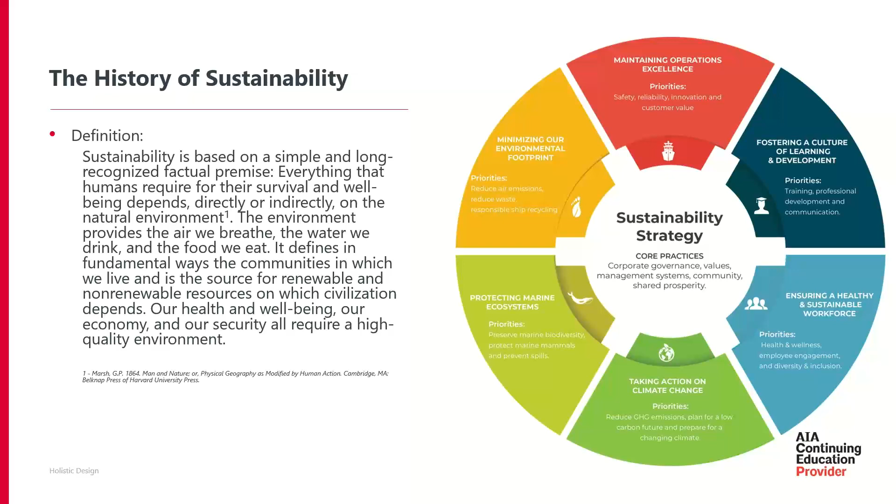Climate change, no matter what your opinion is about climate change, one of the things that we can all agree on is that the need for being responsible with our natural resources, no matter what they are, is super important because we only have so much of all of it. And then protecting the marine ecosystem, one of the many things that we see, especially if we live anywhere near a coast, the horrors of people that have really damaged our oceans and damaged our coastlines. So taking all of that into consideration is important.

So as we move forward, I really want to talk about the history of sustainability. Most people understand it started in the last 20 years, but realistically, it really started from the 1940s, really looking at how sustainability can be pushed into the public realm. So, one of the things I like to tie everyone to, you have to all remember in 1950, the world had a population of 2.5 billion people. And government agencies were really starting to understand that we were growing at a faster rate, and somehow we were going to have to be able to accommodate all the people that were eventually going to be on the planet.

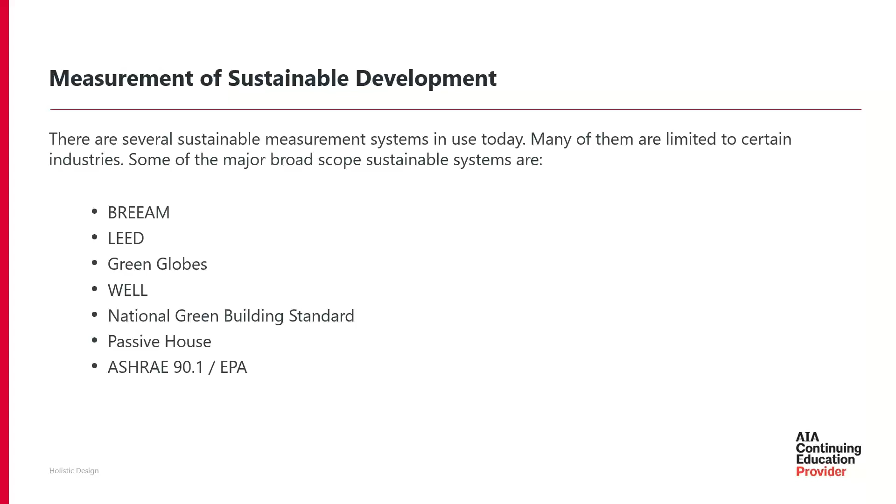BREEAM was the first and was really the precursor for LEED and subsequently Green Globes. We also have WELL now, which was a fold out from really the USGBC and LEED, and then the National Green Building Standard, which many states are now adopting. So we've got green building requirements that exist as part of the code. Passive House has taken on not only a residential aspect, but some of those aspects are being pushed into commercial development. And then ASHRAE 90.1, really the basis of our energy code and how we push that envelope and how sustainable we need to be.

So, some of the questions I like to ask everyone, and today's no different. What are some of the benefits of different fuel sources at our disposal? Is any one better than the other? Are we at a crossroads in energy usage? And where do we go? And can we name the top 5 sources of energy usage today? And how about 1980?

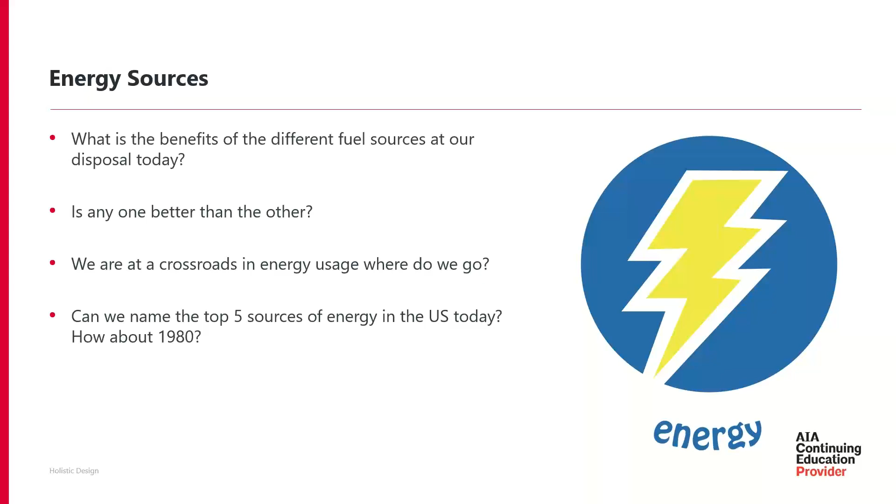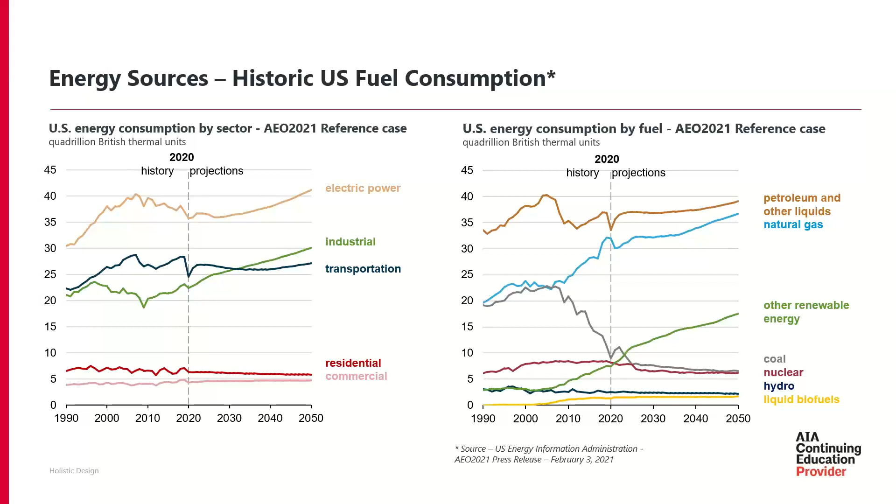But when we talk about energy consumption by fuel, you can see that we have a number of different sources that are all being used. Despite all the discussion in the industry, petroleum and other liquids and natural gas are all being used at a higher rate than anything else, and that growth is continuing. You see our renewable energies in the 90s were around 5% and are now at about 17, 18%. Nuclear has stayed pretty flat, and we'll discuss that a little bit, and coal has seen a significant drop off. And then hydro and liquid biofuels are out there too.

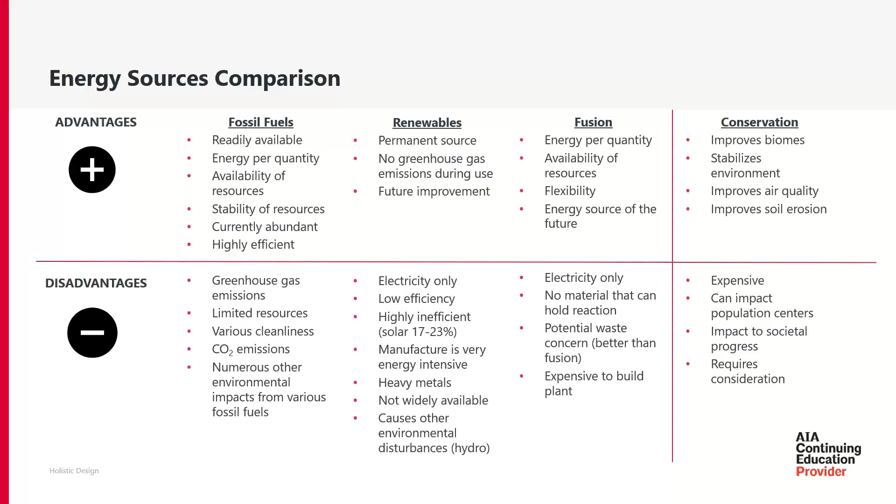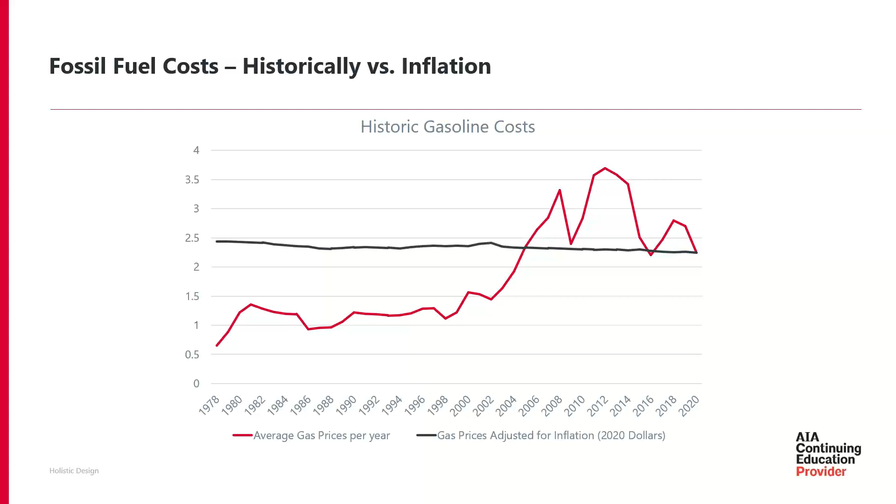We don't see it that way, but it is something that is readily apparent as we look at overall prices. So even when we have spikes upwards of $4, $5 a gallon, we're not addressing some of the California issues where they're up in the $7 range, but we still stay pretty flat. I think the spikes of the last year probably push us more into the $3 a gallon inflation-wise, but still something for us to consider.

In addition, I mentioned earlier that solar really has a positive and a negative discussion. From an installation standpoint, you set a panel up on your roof, it works, it goes along and produces energy, and for the most part gives you most of what you need, because the solar installers are planning for the inefficiency that is in the panels. The downside to it is the cost.

It is a semiconductor-based product, and as such, it has some fairly significant environmental impacts during the manufacture. So we have to consider that when we plan on installing solar panels throughout the industry, because that impact is an issue. When we get to the end of their useful life, which is about 20 to 25 years currently, there's some waste there that can't really be left and ends up in a landfill.

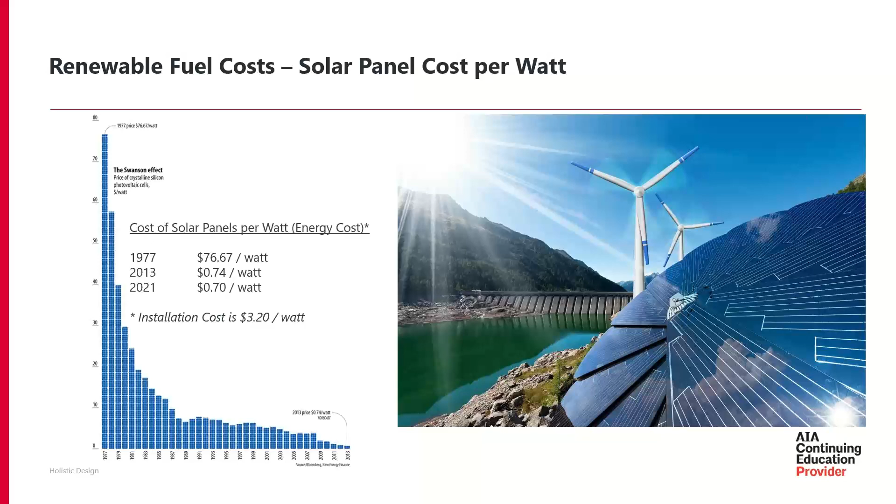So, nuclear fission. I think nuclear fission is one of those things that we talk a lot about, depending on what shape the government takes at any given time. It is demonized, it is considered unusable, but one of the things we need to really think about is nuclear power produces 790 billion kilowatt hours of electricity as of 2019. That was the first time in 2020 that it passed coal. So now we're transitioning to a different form of power. Provides 52% of our clean electricity.

So despite the fact that we have this misnomer of what nuclear energy can really do, we're using it significantly, despite the fact that we don't understand that. 92% energy efficiency at full capacity. So it's producing more energy than anything else from an efficiency standpoint. Natural gas, which is the best of the fossil fuels, is only a little over 57%. The other thing to think about is there's 94 commercial reactors in 28 states, and it helps produce electricity at that efficiency for 28 states in the US.

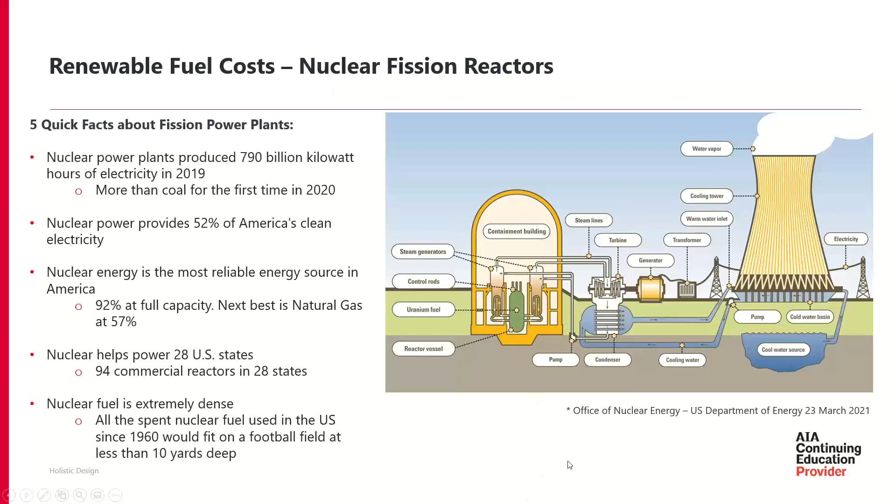So let's translate this into building materials and how we look at what we use. One of the things that we all need to remember is the top 10 building materials haven't changed in over 100 years. We're still using the same things to build our buildings that we used when our grandparents were alive and our great-grandparents. So, how do we use them differently to present a more holistic design for the environment? That's the key. And the key is all about education.

So how do we learn to use materials in a more sustainable way? And what can we do to improve the built environment? So top 10 building materials. This is, as we said, 100 years plus. Steel, concrete, wood. For those of us that do a lot of work in the higher education world, stone, brick, masonry, glass, aluminum, those are all primary materials as we look at the exterior of our building.

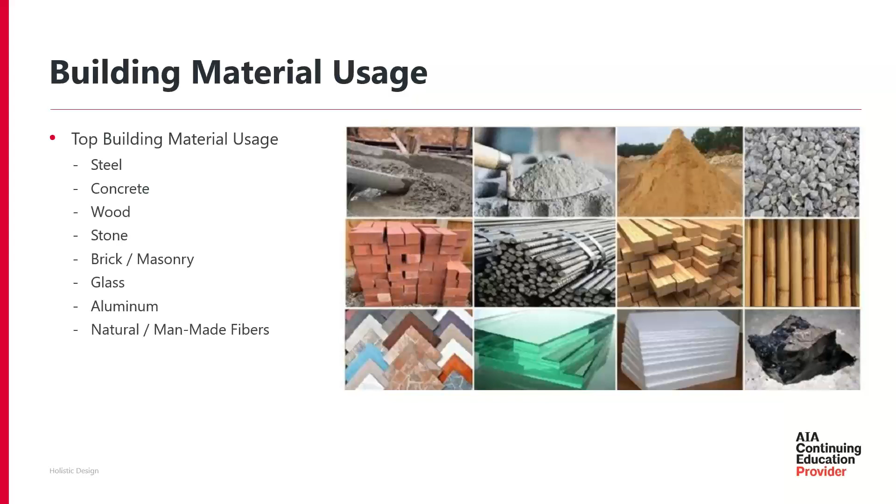So as we look at this, we really have to consider embodied energy. And that's really the driving factor for how we make correct decisions on products and materials to use. So if we start at the beginning and we use the design process and the production process of the material, combining those together, getting it transported to the site, using it, then disposing of it at the end of its useful life.

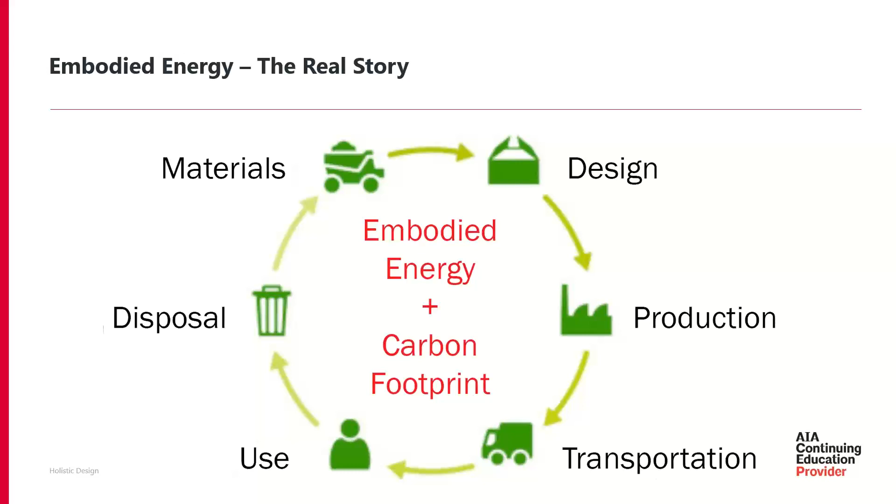So really important here, you could have a product that has a little bit more energy intensive manufacturing if it lasts a lot longer. If I'm having to replace a product every 5 years, its embodied energy isn't really as realistic or good to use overall. But we have to balance that, right?

So as we look at the next slide, what you can see is this is a comparison on just insulation. These are all the insulations that we look at in the world today. And what I want you to notice here is the thickness. To get the same R value for your wall, you have straw bales, which have a very low embodied energy, but you need a lot of it to insulate your walls. So as we rise and fall through here, you have to find that balance between the two.

So if you look at, for example, cellulose fibers, which has an embodied energy of 19, and you look over on the right at the thickness, it's a little higher, but it's a little further down from some of the others. So the polyurethane foam, 130, really high embodied energy, but low thickness. Those are all things as we examine materials that it's important for the end user to understand this balance, because if you come out and say you want a sustainable project, this all comes into play.

Do we use wood versus metal? Do we use brick? Do we use stone? Where do we get the stone from? All decisions that you have to make, because as we discussed earlier, transportation is a huge part in how we get materials to site.

So let's translate this to how it works for the university environment. I think one of the major things we have to consider is this is a holistic project. We have to start from land use. So as most universities have a campus that they work on, or they're expanding to remote campuses, especially with the post-COVID world, and students coming back to university sites in varying amounts, a lot more online classes, a lot less large lectures, we have to look at what's the best use of land.

And then the next step is I encourage every client to reach out to design professionals and talk about master planning their site. Something that's passionate to all of us on this call is not only the best use of land, but then a logical plan that leads us forward. So we have a map, so we can make informed decisions, so we can plan for a budget. All super important to help maintain good financial decisions.

Embodied energy material use is also super important, because there you're making the decisions at that point on how and what material we use. And what's its impact? Are we being good stewards? Or are we using materials to one degree or another that are wasteful?